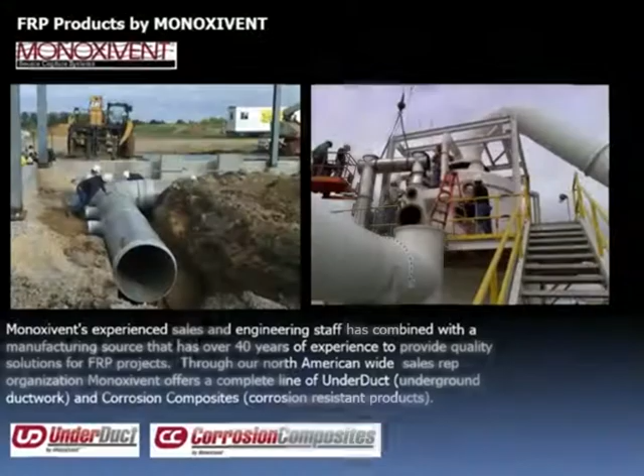We've developed a product line of both UnderDuct and corrosion composites. Corrosion composites is the industrial water, wastewater product, and today we're going to emphasize the UnderDuct product. Our staff has over 40 years experience in manufacturing, sales, and marketing. We have a rep organization all over North America, and we'll talk about that a little bit later as well.

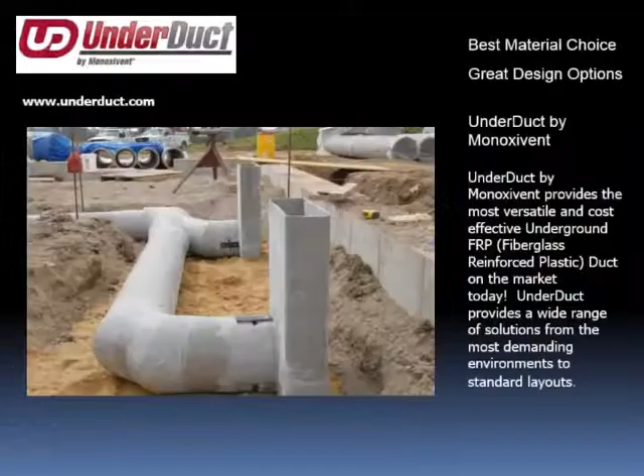UnderDuct is really the best material choice for underground ductwork for heating and ventilating. We say that as many buildings are now going to displacement ventilation, and when you bury a duct underground, it is very important that it doesn't corrode or leak.

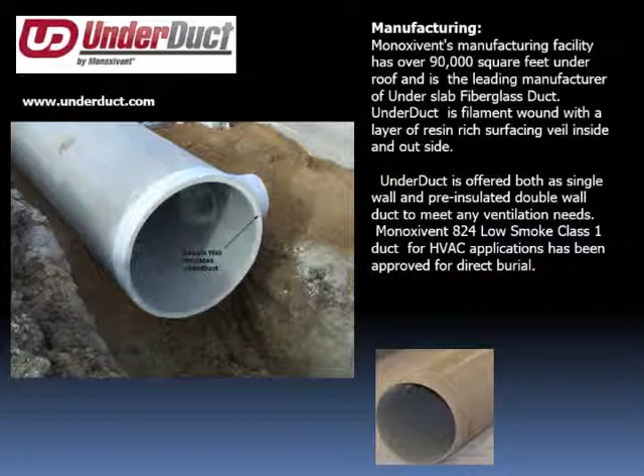We offer both single wall and double wall. The facility where it's manufactured is over 90,000 square feet of building, not considering any of the outdoor space that's available. The single wall and double wall are probably equally sold as far as the market is concerned. The insulation value is the main reason for the double wall.

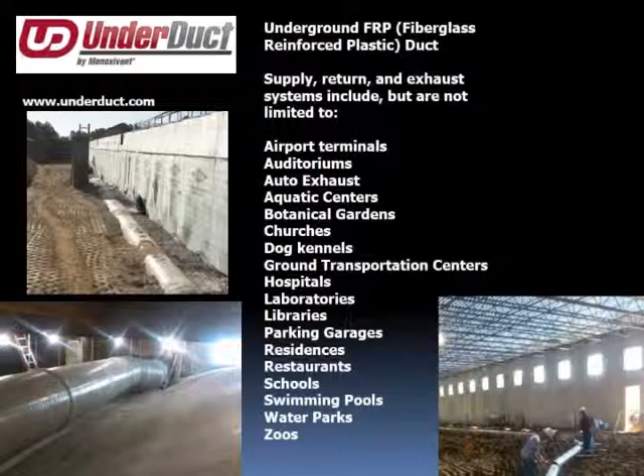UnderDuct advantages. It's corrosion resistant. Soils are typically acidic or caustic, and the fiberglass is not going to corrode or deteriorate underground. It's watertight. When the sections are joined using the ASTM standard methods, you get a watertight joint. And if you have a sprinkler go off or a flood, the duct can be pumped out and there'd be no ill effects.

Ease of use. It's shop fabricated to the maximum extent, creating as few field joints as possible. The factory assembled sections are lightweight, can be handled by a couple of men, and it doesn't require a crane on the job site. We have several different joining methods available.

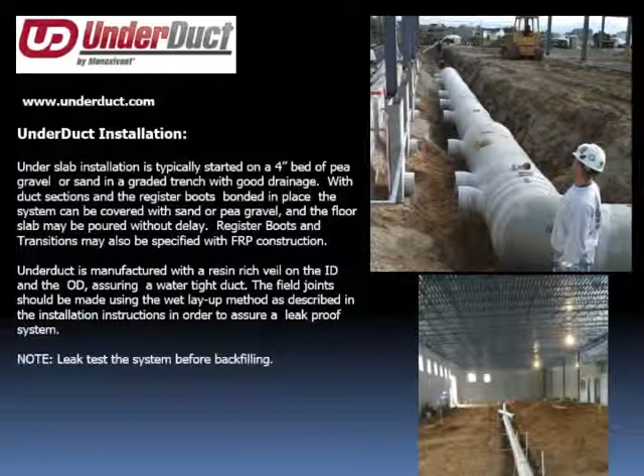UnderDuct installation. This is a typical installation you're looking at. We recommend that it be set on a 4-inch bed of pea gravel or sand in a trench that has some drainage to it. If you look at the picture on the upper right, you'll see the register boots along the wall with the pink foam board on the back side of them for insulation. Our register boots are always single wall. All that duct is double wall at that particular project, the Davenport Library.

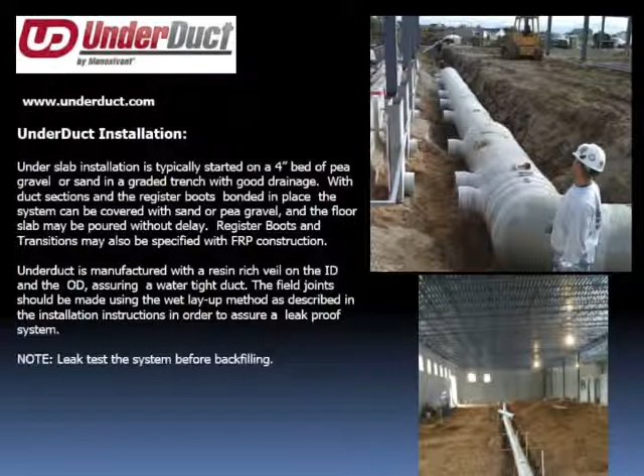And the lower picture is again a VE duct job, and that is also the University of Minnesota at Winona. All of our UnderDuct has a C-veil on the interior and the exterior, which gives it a resin-rich surface, which prevents any leakage or damage to the structural layers.

Shapes available. The shop has years and years of tooling for round. Round is a better airflow system, always less expensive, but we can make rectangular duct, oval duct, or whatever shape or transition required. We go from 2-inch up to 14-foot diameter. Ductwork typically doesn't get that large.

The double wall is always sized by the ID, and the wall thicknesses are all governed by ASTM standards: ASTM D3982, PS 15-69, and the SMACNA standards. And the wall thicknesses apply to both the inner and the outer shell on the double wall.

Green Build. We're a member of the Green Building Council, and the duct has some great qualities that contribute to green building. Sustainable building, we have energy savings with the insulation. We have maximum airflow and efficiency because of that smooth wall. Resistance to mold, corrosion, leakage, moisture damage, low smoke, flame class 1 rating, flame and smoke. Long life, that's one of the issues that comes up in LEED points, longevity.

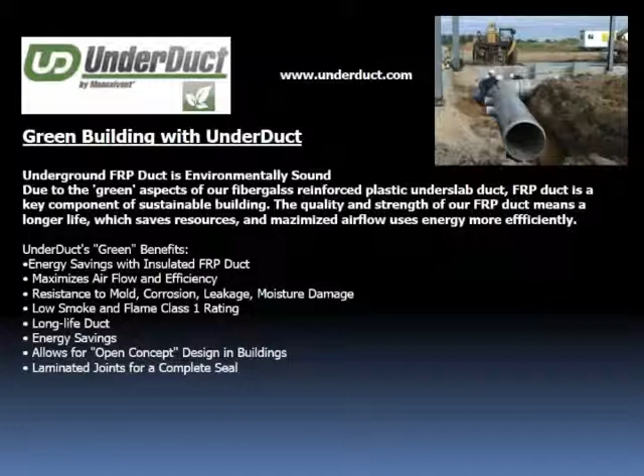We feel that UnderDuct is the #1 choice for several reasons. The big one is corrosion resistance. As we mentioned before, it can withstand the harsh environment, very wet corrosive systems where the water table may be up. And we feel it's a clear choice over stainless steel, galvanized, PVC, PVC coated, or polyethylene.

UnderDuct is designed and approved for direct burial. It does not require concrete encasement as with metal duct when buried in compacted sand or pea gravel. UnderDuct does not require hold downs as you would if you were trying to encase it in concrete. It won't bend, crush, or leak due to burial conditions.

High strength to weight ratio. Filament wound composites are very strong, especially in the hoop direction, which gives us some excellent numbers with regard to strength for burial. If you think about composites in general, the lightweight, high strength thing, vehicles, that's where they're going with it. A 20-foot section might only weigh 100 pounds, 200 pounds, and the guys on the job site can handle it.

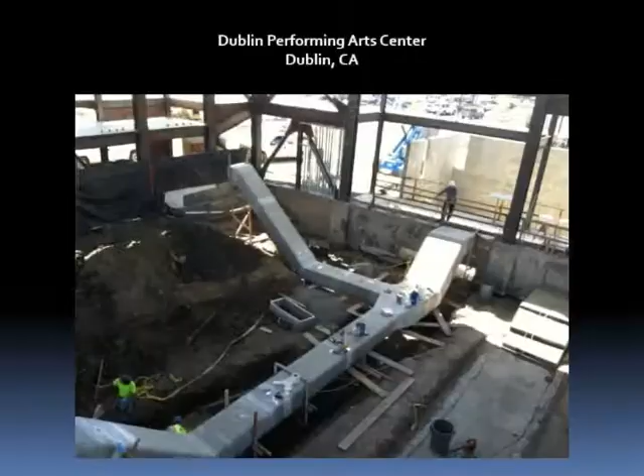This photo is of the Dublin Performing Arts Center in Dublin, California. This is an unusual job in that it's all rectangular. And there are several extenuating reasons for that, but it's a big auditorium, and you see the size of the duct from the man standing there. This is a rather unusual job. In the rectangular duct, especially the large stuff, we do recommend that it be concrete encased.

Yes? Does UnderDuct need to be concrete encased for H20 loading? The question was, does UnderDuct need to be concrete encased for H20 loading? That would depend on the size of the duct, the burial depth, whether it's double wall or single wall, but we would typically do some calculating and let you know whether that can happen or not. And if it's under a concrete road slab, then the answer is no.

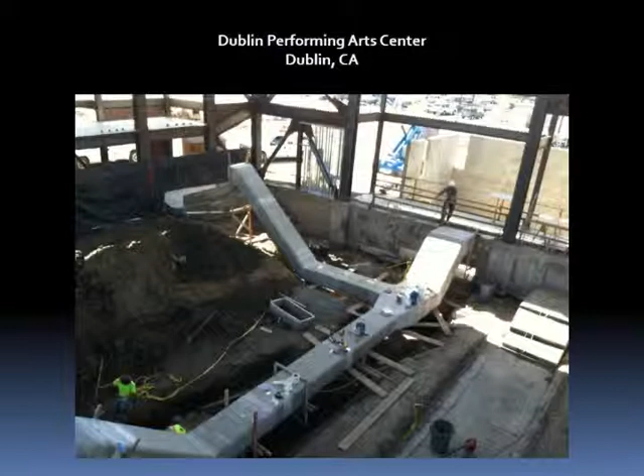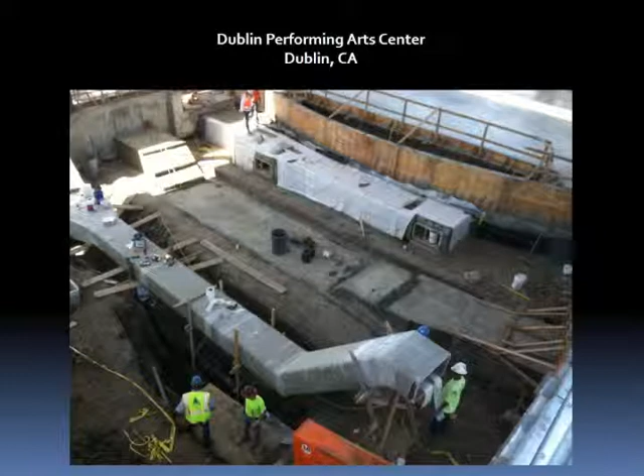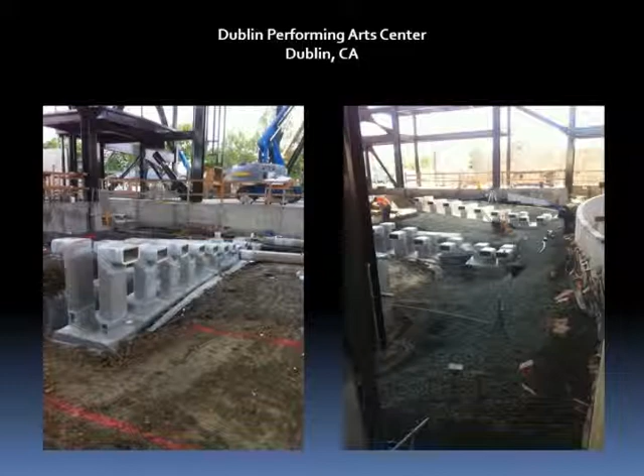Here again, you see the contractor setting up the duct, and in this case, they did all the fabrication even before they filled in underneath it. As the finished floor of the auditorium started to rise up, all of these UnderDuct outlets are going to be under the seating. So you get an idea of the complexity of some of the systems. Here again, the contractor is making some adjustments. The field adjustments are fairly easy to make in the field. Once the contractor is familiar with them, they have no problems.

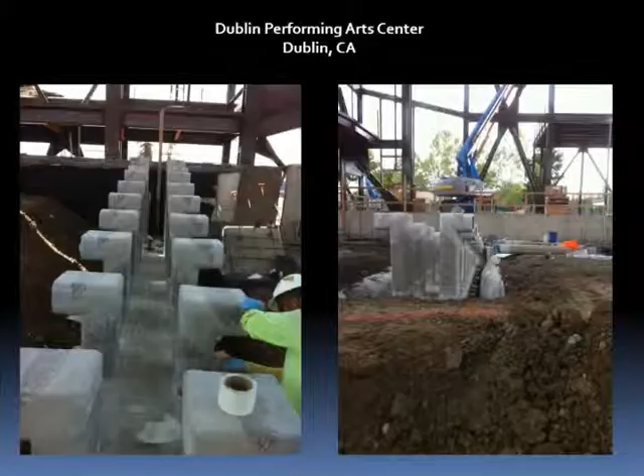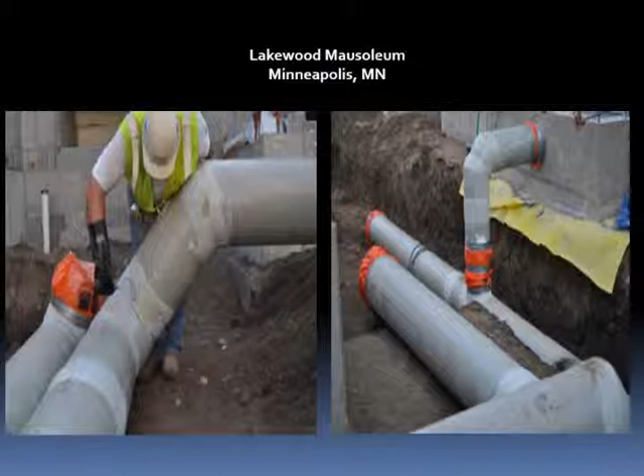This is another job up in the Minneapolis area. It happens to be the Lakewood Mausoleum, and the contractor had set most of the duct. We paid a visit to the job site to assist them in getting started on the joints so that we could take these photos. And they had wrapped all of the joints with plastic to keep them clean. So that's what the orange plastic is for.

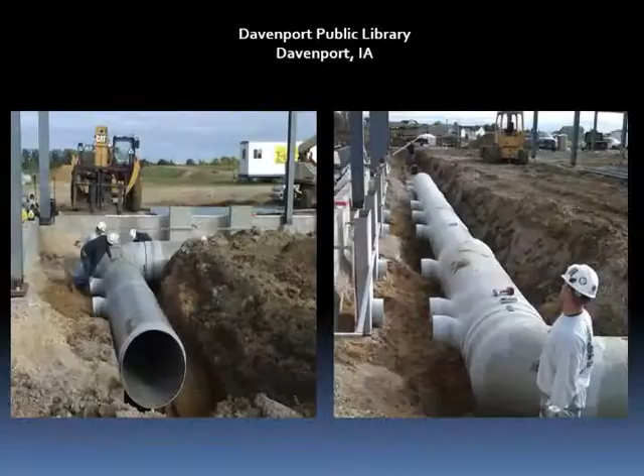This is the Eastern Avenue Library in Davenport. This was one of our first large jobs. And again, you're looking at a 36-inch diameter piece on the left-hand side. That was shipped out as one piece where the man is making the joint up at the far end. That's one piece that came from the shop. Here again, Eastern Avenue Library. See two sections that are coming up into the mechanical room. The plumbing fixtures are coming up. We coordinated all of the drawings with the plumbers and other utilities.

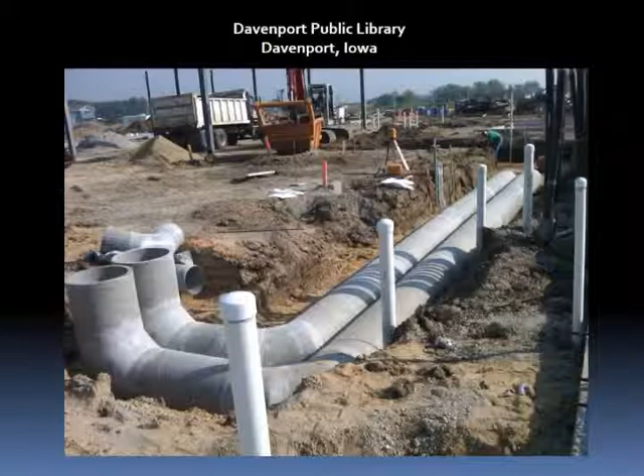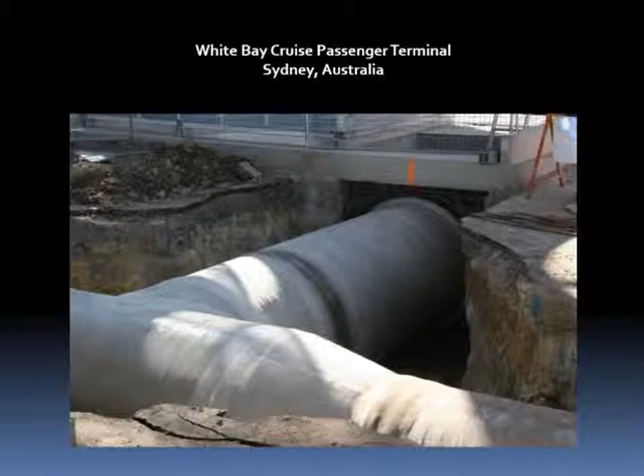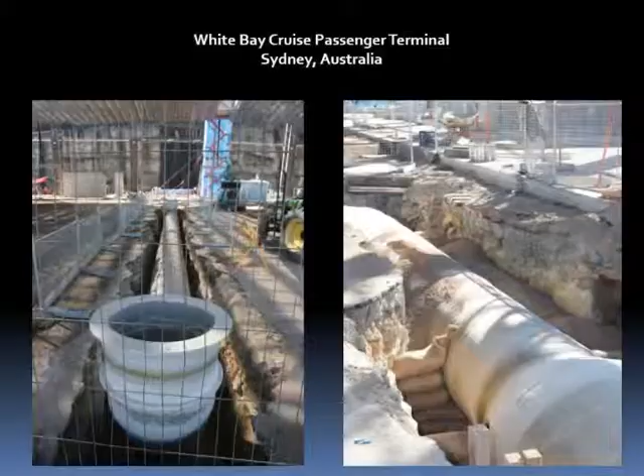Now we're looking at the Kansas City Zoo. This is UnderDuct used in an aquatic situation, swimming pools, aquatic centers, zoos, where chlorine is in the air. It's an excellent product for using above ground. And this was the penguin exhibit at the Kansas City Zoo.

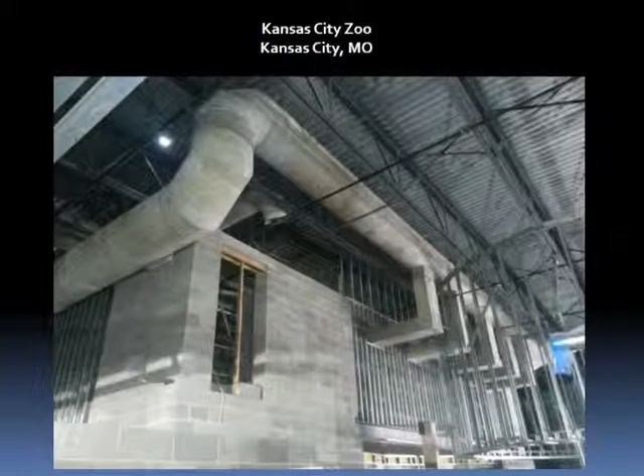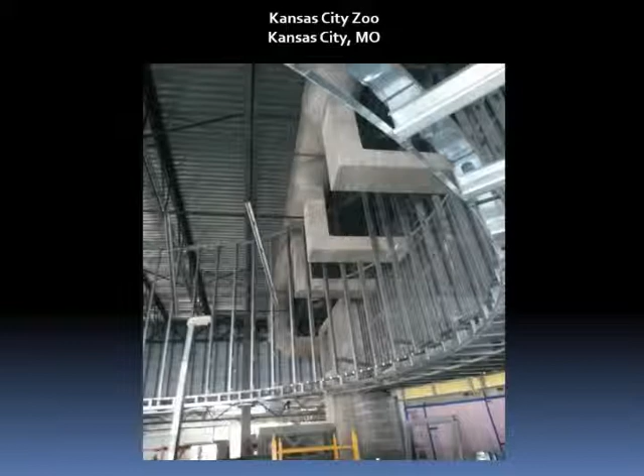Again, the Kansas City Zoo, you see the rectangular drops coming out and going through a wall. Material integrity. It's a filament wound product, and the resin and the glass are both inert. We don't have any metal tinfoil liner. We don't have anything there that could corrode or create a problem down the road.

I mentioned before the hoop strength makes it very, very strong with regard to burial, and you'll see later the testing that we did exceeds any other product in that respect. Monoxivent UnderDuct products have been rigorously tested and approved by the International Code Council and meet the following codes. International Mechanical Code, IMC. International Residential Code, IRC. Uniform Mechanical Code, UMC. California Mechanical Code, CMC.

We spent the year 2012 going through testing and applications to get this ICC approval. So this is news as of November 1. We are tested and approved. UnderDuct is versatile. As you see, it can be used above ground, can be used below ground. We can make any kind of a fitting.

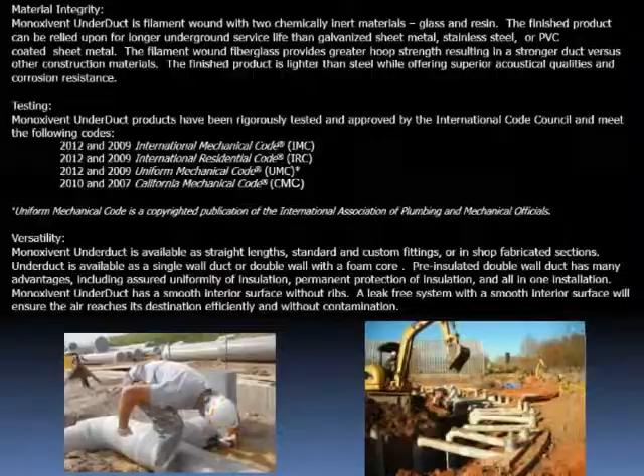This is the International Code Council, and this is our official approval that went into effect called the PMG, and our number is PMG 1171. Product has gone through rigorous testing and has surpassed the requirements of the existing code. These include flame and smoke spread testing, insulation value, water leakage, structural testing.

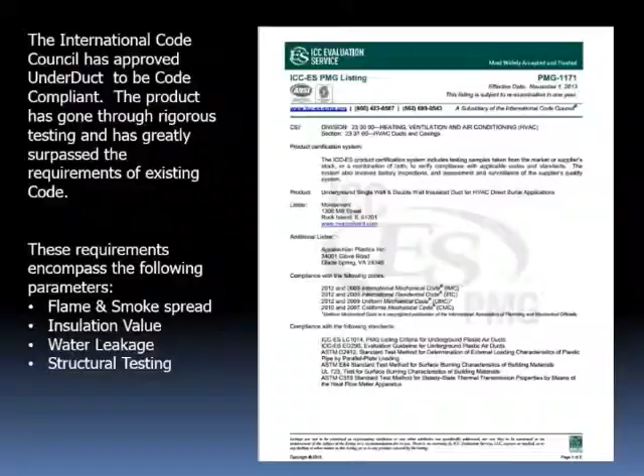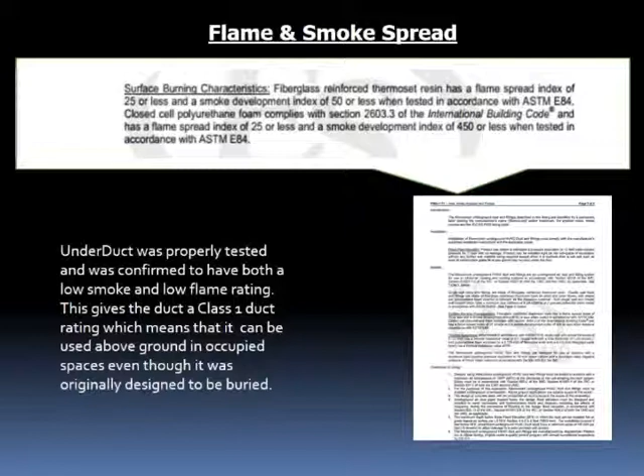Flame and smoke. The standard test for flame and smoke is ASTM E84. It's a tunnel test for how the flame would advance in a given size tunnel, both with and without ventilation. And the flame spread should be less than 25, and the smoke development should be less than 50. And we've tested, and the ICC testing organization has tested, and we've passed that with flying colors.

The insulation value, this is one that's sort of hotly debated, but many of the codes now require for supply duct to be an R6. California requires R6. Many other states require R5. ASTM C518 test is the proper method for determining the amount of heat flow through a given material. We are tested and proven to be an R6 value with our standard 1-inch insulation. And that complies with California's 2014 requirements, which are the most stringent.